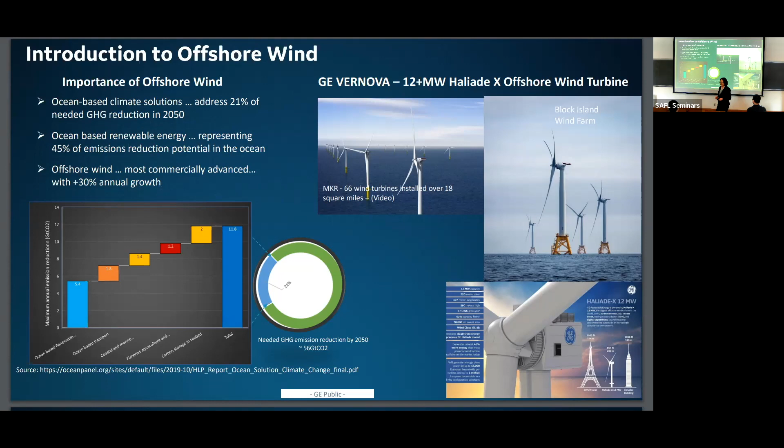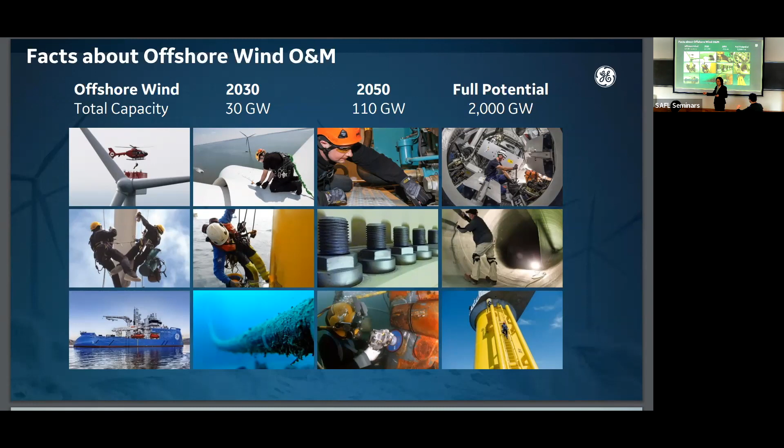And all these activities, firstly, impose danger to our trained technicians, to human life. On the other hand, it means a huge amount of cost. It, of course, dramatically increases your levelized cost of energy. So that's why we launched the Stay Ashore vision. Before I talk about the Stay Ashore vision, I want to give you just a little bit of background in terms of what we do exactly for this maintenance, right?

So you may hear from onshore practice that the O&M cost contributes about 20% of the levelized cost of energy. For offshore wind, this number is 35%.

For normal practice, there's planned maintenance and unplanned maintenance. Planned maintenance you do once or twice a year. During this maintenance, you may need to do the regular inspection and lubrication, maybe bolt torquing. I showed a picture a moment ago; it's really tightening the bolts. And also, you may do some inspection, for example, of the blade health and so on and so forth.

So the Stay Ashore vision is really about improving the productivity of this planned maintenance. You just touch the components as necessary. Your time is meaningful, instead of just doing it based upon the calendar according to your manual.

The second type of maintenance is unplanned maintenance. That means you operate your turbine remotely somewhere in the Atlantic, but somehow your turbine stops operating and you lose production. So you need to send someone over there. Renting the boat is hugely expensive. So we want to avoid this unplanned maintenance through remote monitoring, AI, digital twin, of course.

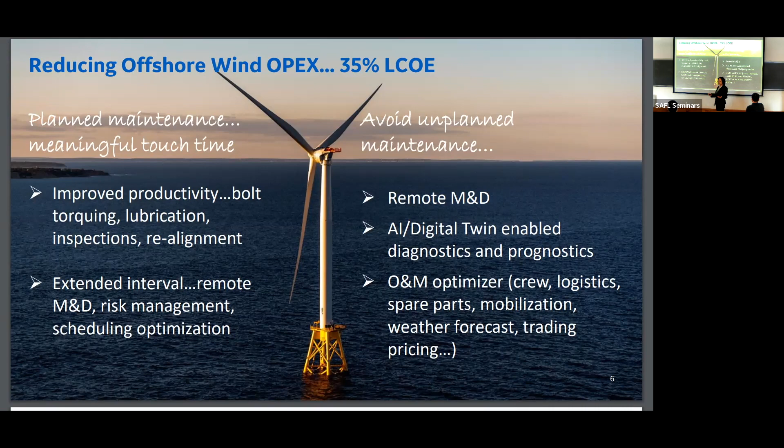In the future, you want to reduce human-dependent operation and maintenance. You want to utilize robots and underwater vehicles to perform these tasks. So what is the Stay Ashore vision? In the Stay Ashore vision, we include 4 elements of technology. The first one is connect.

In order to understand the health condition of your turbine, your wind farm, you really need to deploy sensors to monitor every component, every subsystem, the entire turbine, so you can have data. Transmit the data to a remote site, so the data is accessible from anywhere around the world. That's the first element. The second element is analyze.

Once you have the data, what can you do, right? Luckily, there's AI and machine learning advancement. There's the digital twin model that has been applied in other industries, such as conventional energy generation, aerospace, and even transportation, right? So we want to leverage the technology advancement in other industries for offshore wind operation and maintenance. That's the second element. The third one is managing.

You have the data, you have the model to uncover the hidden insights, tell you the history, the present and the future of your assets. Then what do you do? So there are decision support kinds of activities. We call it manage. The last one is optimize.

One option is, okay, my AI model tells me this blade will fail in 3 months. Should we do it in 3 months? Or should I do it in the next 2 months? Or I can run the blade a little bit harder, if I can afford the reliability price. Because it's the summer season, the energy price is high. Economically, I can make more money, although I sacrifice the reliability of the blade. So all these factors need to be considered and optimized through a model. That's the last element, about optimization.

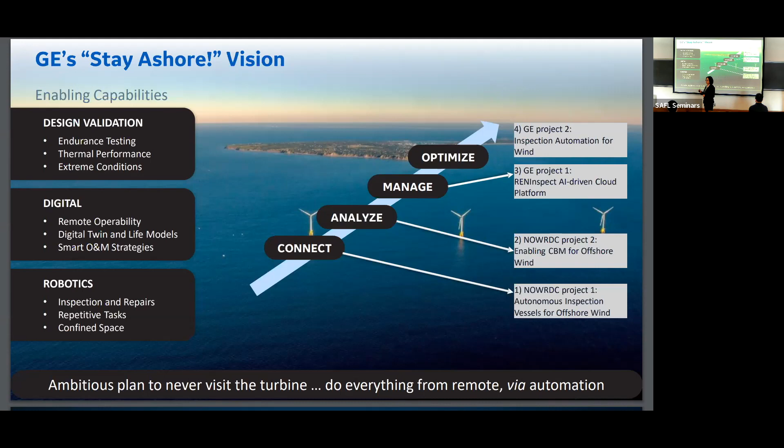These 2 projects are funded by the Department of Energy, the National Offshore Wind Research and Development Consortium, and also NYSERDA. NYSERDA stands for New York State Energy Research and Development Authority. So I want to acknowledge their funding support and also their guidance on the project direction and program management. But by no means do the topics and conclusions I present represent any point of view from DOE, NOWRDC, or NYSERDA.

So the first project is about the autonomous inspection vessel for offshore wind. This project was started in October of last year, so it's still ongoing. The goal of this project is really to utilize an autonomous vessel to help us acquire data from the turbine instead of sending humans or adding new sensors.

Although I mentioned in the Stay Ashore vision that you want to monitor every component, every turbine, adding one single sensor will add cost to the entire capital investment. And in the meantime, once you have one more sensor, sensor failure may contribute another failure mode. So ideally, you don't want to add that many sensors on the turbine. Enough is enough. But what can we do? We can utilize this very mobile autonomous vessel to acquire data and do the inspection.

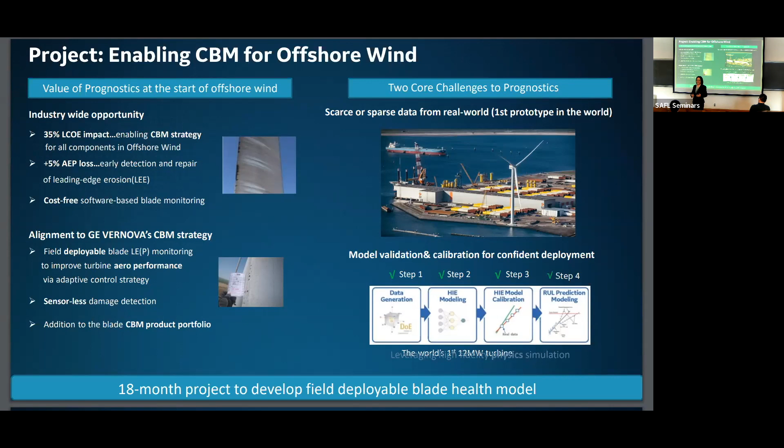In our project, we embrace a four-step approach to tackle these two scientific challenges. The first step is data generation. We have lots of data, which is good turbine operation. We want to simulate some of the failure events so we can utilize the model. That's step number one. Step number two, of course, is model building. There are so many different machine learning approaches; you still need to do a fair amount of research to identify one optimal model that gives you good performance. The third one is model calibration. And the last piece is remaining useful life prediction. Besides knowing today's state, you want to predict what will happen in the future.

Okay, so before I jump to the step-by-step progress and results, I want to share our approach first, just to give you what we're doing and how we do this. Our approach includes two phases. The first phase is generating data. In short, generating data means we utilize a high fidelity physics model to generate simulation data. This simulation data represents how the turbine will behave under different failure modes. This high fidelity physics model is a turbine design model. In order to do the data simulation, we laid out a design of experiments, which includes different combinations of wind condition, environment condition, and roughness levels.

Now you may wonder why we are talking about roughness level. We're talking about leading edge erosion, right? Leading edge erosion really changes the surface roughness of the blade. This high fidelity physics model cannot ingest leading edge erosion, but it can take in roughness level changes. So we use roughness level to represent leading edge erosion. Hope this is clear. Through this design of experiments, we can generate a bunch of outputs. These outputs are really the operational variables for a particular wind turbine.

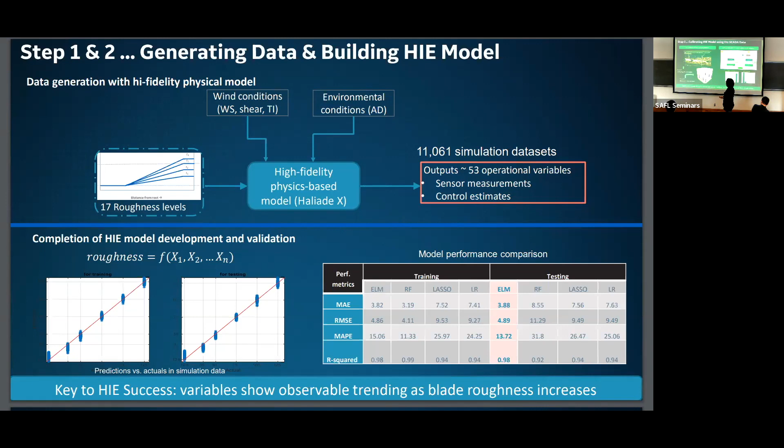So the third step is the calibration. As I mentioned, in order to have the confidence to deploy your model, you have to validate and calibrate the model. We came up with 2 different calibration methods and strategies based upon the real scenario. In the real scenario, the first type is really about the difference between the simulation space and the field space. So this is the Haliade-X prototype, the 12 megawatt prototype in Rotterdam in the Netherlands.

So we got field data from this turbine. We compare against our simulation space. We see the difference between those. So that means, okay, from the simulation, we know the design specification of this turbine, but in reality, in Rotterdam, it seems the environmental condition is more toward a little bit another end. So the calibration approach to deal with this difference is to re-simulate. We know the reality. Let's just add a little bit more DOE to our simulation so we can cover a broader space. That's the first calibration method.

The second calibration method is really about dealing beyond the simulation. So I mentioned the Haliade-X is 12 megawatts by design. But everyone is competing for higher capacity. So this 12 megawatt prototype has been operated at 13, 14 megawatts in different time frames to get the certificate. Once you get the certificate, you can start to sell these turbines to customers.

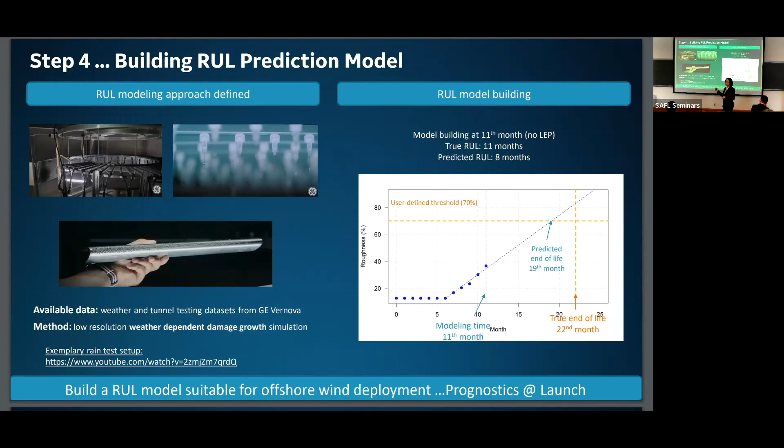So I just want to give you a summary in terms of what we got, the key takeaways from this project. The first one is I mentioned the grand challenge for building this AI machine learning model from the start of the assets, from the new assets. So what are the key ingredients here for success? The first part is from the model building perspective.

Data is a challenge. If you go to any offshore wind related conference, people always say, oh, we want more data, share your data. Why are you guys so enclosed, right? So my point of view is, no one has the data. Even the operator, the OEM, you only have a limited amount of data, which is good data. In order to build a model, you need the bad data, which is the failure data. So try everything to get the data. Either like our case, from simulation or from lab testing, just leverage any data you can get access to. That's one.

Second is, in order for the model to be successful, you need to cover a wide range of operating modes. As we did, well, we ran the simulation and considered the difference between the simulation space and the real field, and then reran the whole simulation.

That's that. The last one is the domain physics knowledge. So I think this is very important. If you still remember the two-phase chart, on the top, I mentioned these 11,000 DOE simulations. The outputs are 53 operation variables, but we didn't use 53 operation variables. Why? Because for this 12 megawatt turbine, you may have the 53 operation variables. If you go to somebody else's turbine, they may not have those 53 operational variables, right?

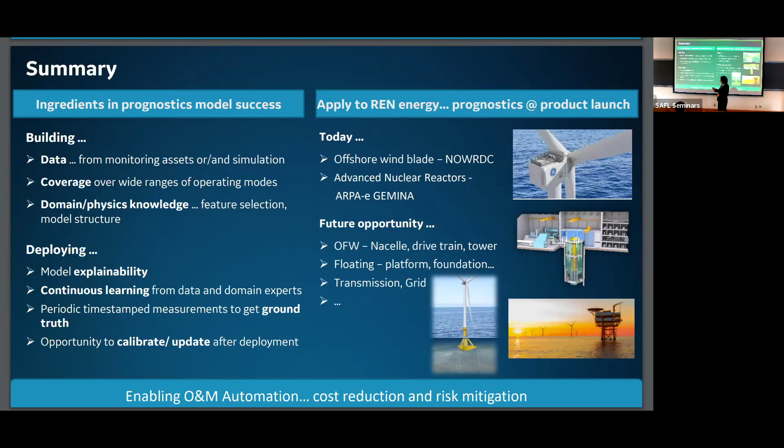Thanks for your interesting talk. I'm very curious about the first step, data generation. I'm not familiar with how industry models work, but I'll talk in terms of the CFD perspective. Usually when we prepare the data, if you put more physics, more details inside, it becomes more expensive, but the quality and accuracy are better. If you make it rougher, it becomes cheaper, but you lose accuracy. So I'm interested in your trade-off consideration for data preparation.

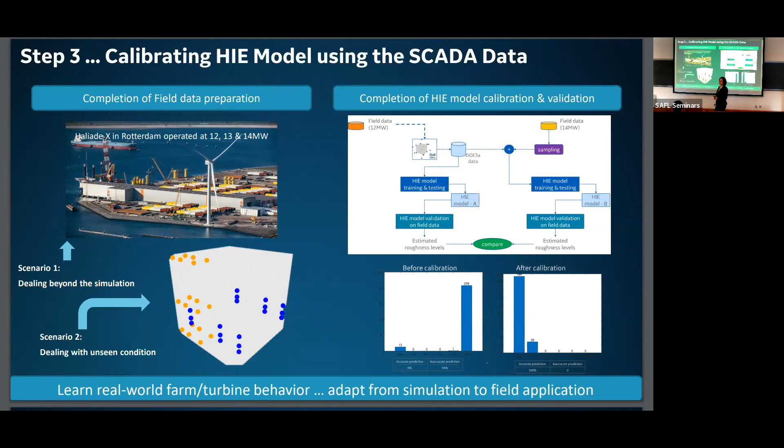Real time is a little bit exaggerated because the leading edge erosion does not change in minutes, right? It may change in weeks, in months. But in general, in order to run the model utilizing real-time SCADA data, you want less computational power. You want the model to be very light. That's why we reduce the inputs to 7 to 10 variables. So once you split data generation and model building into two different phases, I think the concern you had may not exist.

Thank you for the talk. I was curious about the sensor boat that you described in the first part of the presentation. Is it continuously deployed? I understand it's remotely controlled. And what makes it better than, say, a flying drone? I know you mentioned that you don't have to stop the turbine operation while using the boat, as opposed to a drone. Could you comment on the benefits of using the boat design instead?

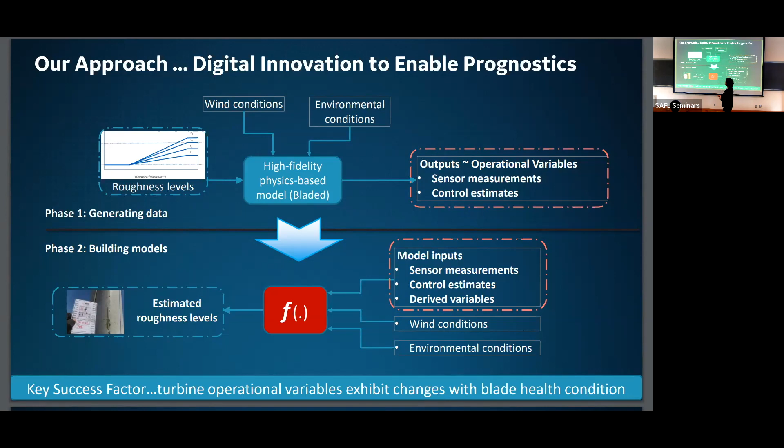Yeah. So firstly, my point of view is not to get rid of drone inspection. Drone inspection is still very valuable and useful. We will use it for a very long time, maybe forever, for this type of maintenance. The project I presented is just another way to acquire data. So it's complementary to drone inspection. Yeah. Thank you.